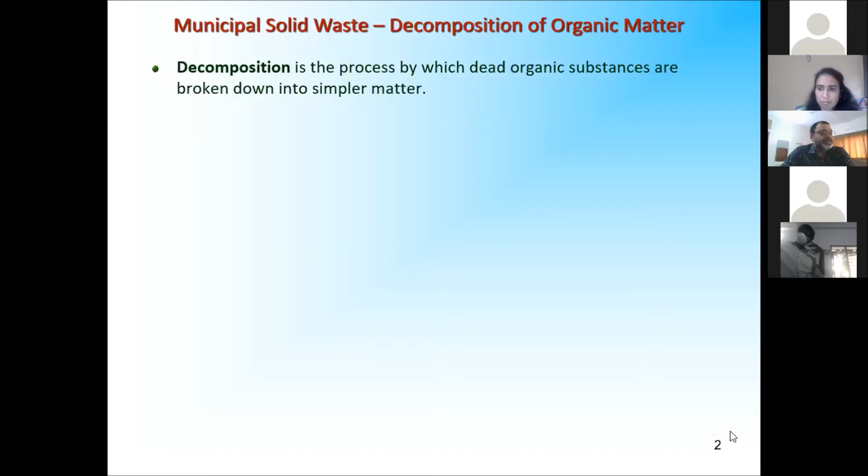Any organic matter, friends, when it dies, will break up into simpler matter. Simplest definition, that is called decomposition. When we say do not use plastics, it means it does not decompose practically. But organic matter will decay once it dies. What is organic matter? We are organic matter; fruits, vegetables, all restaurant waste, everything is organic. When it dies, it starts decaying.

I told you jokingly, why do you keep a refrigerator in the house? Because you are only storing dead bodies in it. Bhindi, aloo, pyaj, sabji, chicken, all are dead bodies. Since the temperature is low, the decay is not very fast, so you can still consume them within 2, 3, 4 days. But don't keep things in the refrigerator too long. Try to consume ASAP.

Now, friends, when God created Earth, they were conscious that human beings would come, and we need a system by which organic matter decays automatically. This decay is facilitated by microorganisms, which are present in our earth, our ecosystem, our soil, our water. They are everywhere.

So this organic matter will decay in two ways. In presence of oxygen, we will call it aerobic decomposition. So oxygen means what? It will take it from air, and air is 20% oxygen. And the microorganisms, chiefly bacteria and fungi, will use oxygen and feed upon the organic matter. And that is how the organic matter will start decomposing.

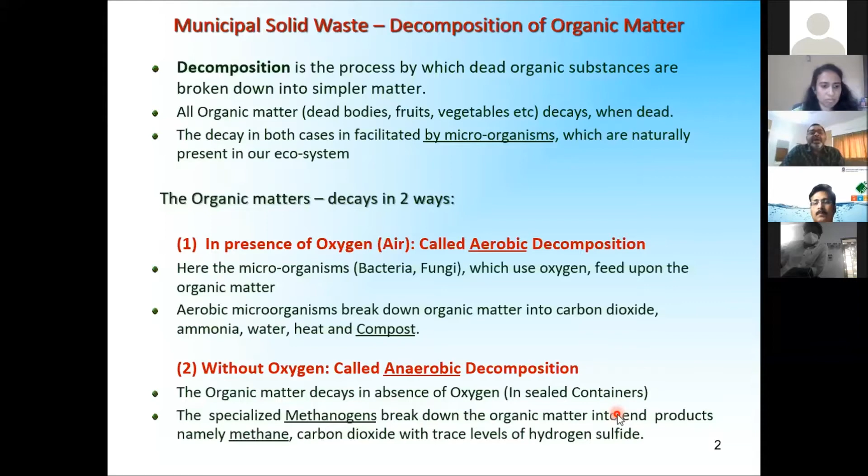And then there are traces of hydrogen sulfide. All this bad smell which comes when you go to a dump. I'm not talking of a landfill, secured landfill. Because mostly Indian cities, you know what they do? In the name of waste management, they will collect and transport garbage, and finally they will dump the whole thing just outside their welcome gate in somebody else's land. So that is called a dump, where this hydrogen sulfide and methane are all getting produced. So this is the concept. I've given this so that you will be able to appreciate the topic in a much better manner.

Now I'll just briefly touch upon the concept of waste management: reduce, reuse, recycle, recover, dispose. I am not going in the details. As good human beings, as good citizens of this earth, we should explore all the options of recycling, recovery, etc. When all options are exhausted and nothing can be done with the waste, and the definition of waste is a material which has got no use for mankind, but that waste could be very toxic. It could come in contact with air, water, and soil, what we call environment. So it has to be then safely disposed, or else it will disturb the environment. And the scientific disposal of the waste is done in two ways.

If you recall, I had told you that one thing is certain: we may be very good, we may be very bad, we may be rich, poor, beautiful, not so beautiful, but the common thing is all of us are going to die one day. Don't feel sad. This is a hard fact of life. Therefore, enjoy life till you are alive, till the last day. But if we are lucky, somebody will bury us or somebody will burn us. Similarly, all the waste in the world which has got no use to mankind is either buried or burnt.

So today our topic is only burial. Next time when Professor Chari gives me an opportunity, I will talk of incineration. It is very difficult, but since we are doing this incineration in Hyderabad, maybe an opportunity comes, I will talk about incineration of waste, because this is going to be the future of the country. Okay, burial. And remember, whatever we do, landfill, incinerator, it has to be done in a manner that in that process we should not disturb the environment, that air, water, soil are not affected.

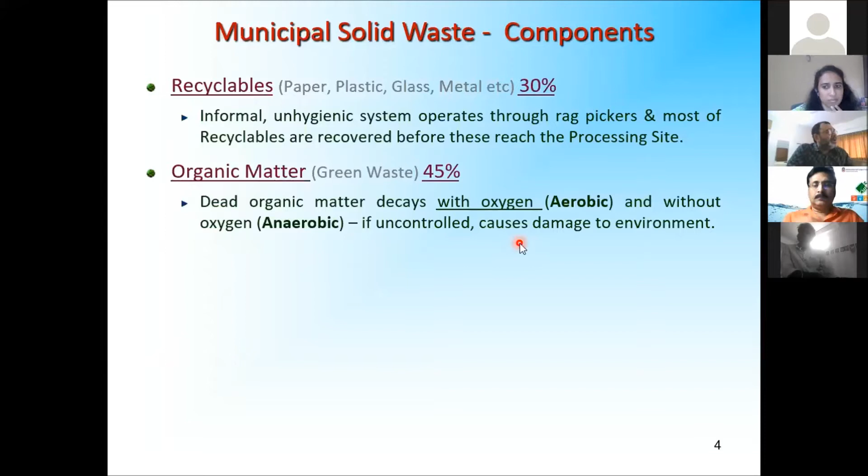Let me tell you, in India, we are only supposed to put inert material in the landfill, secured landfill. Why? Because even in the inert material, there are traces of organic material. But abroad, what they are doing, they are putting the entire organic material inside the landfill. Methane is getting generated at such a pressure and such a rate that it is good enough to power the electricity producing plants. But in India, we do not allow the anaerobic landfills.

That's what I'm trying to say, because it is very difficult to construct and more difficult to maintain. It can cause accidents. So when we talk of secured landfill, we are only talking of putting the inerts. And what are inerts? You know that.

So when we actually process the municipal solid waste at our site, as you have all learned by now very well, we convert the organic fraction into compost through aerobic decomposition. And we can also resort to biomethanation for waste from the market yards or sabji mandis, because unfortunately the fact remains, in India waste is not segregated, and it will not be segregated till there is a political will.

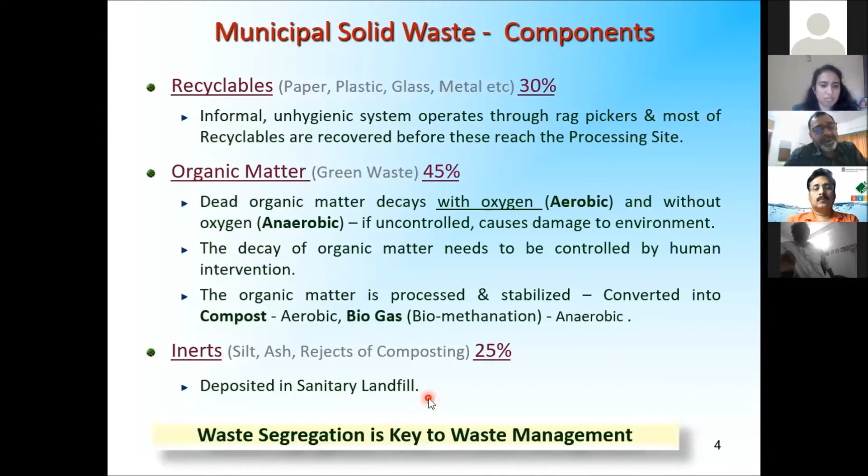So we should not encourage landfills, but it is a majburi. It is a necessity. It is a necessary evil. Though we are making money by making and operating landfills, you know that money is not important. Mankind is more important. So hope you get the message. So ultimately, whatever we discuss, that's fine, but waste segregation ultimately is the key to waste management.

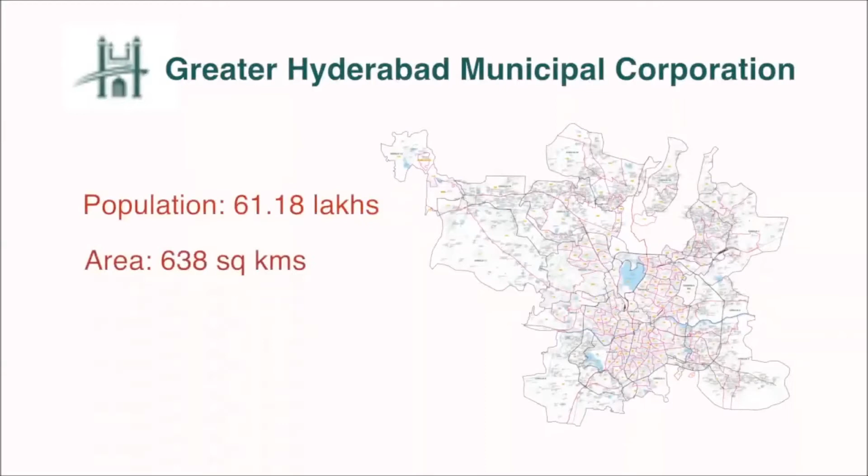The population growth, rapid urbanization, and the changes in the city of Hyderabad have seen the coming of the Greater Hyderabad Municipal Corporation. The Greater Hyderabad Municipal Corporation, or GHMC, is the local government for the cities of Hyderabad and Secunderabad. Improper management of municipal waste by disposing it unscientifically into open dumps and landfills is creating huge problems to public health and environment.

With a commitment to better the environment and to provide the best sanitation services to the citizens of Hyderabad, Ramki Enviro Engineers, a pioneer in waste management, has established a quality delivery system, the Integrated Municipal Solid Waste Management Project. The HIMSW project uses the most environmentally sound strategies for municipal solid waste.

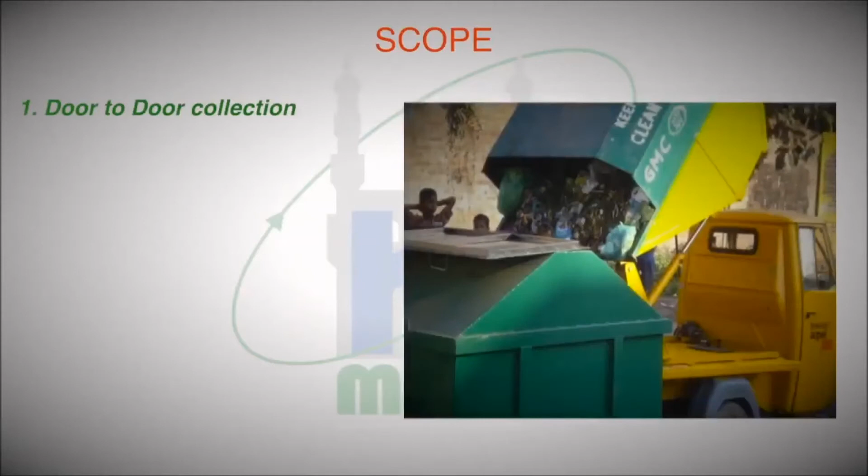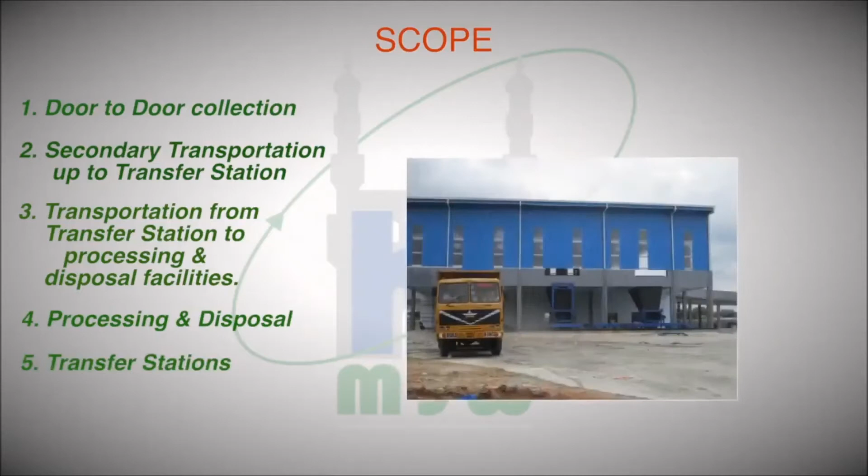Scope: door-to-door collection, secondary transportation up to transfer station, transportation from transfer station to processing and disposal facilities, processing and disposal, transfer stations, reclamation and alternative use of existing 4 dump sites.

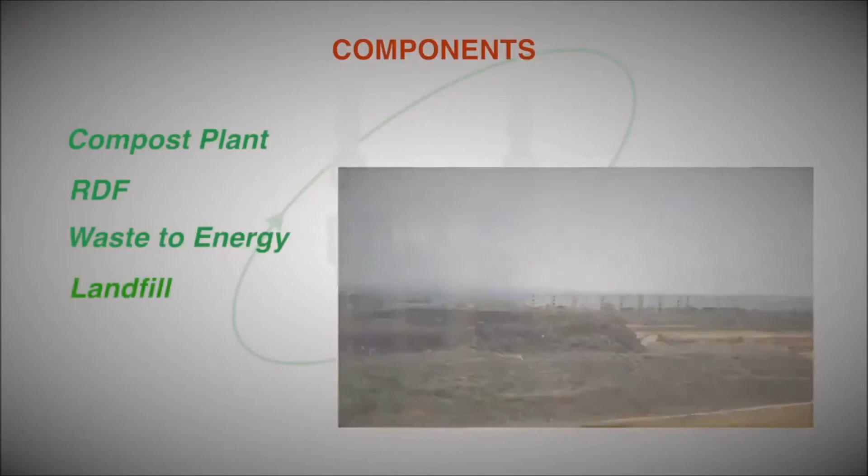Components: compost plant, refuse-derived fuel, waste to energy, landfill operations, capping of existing dump, leachate management.

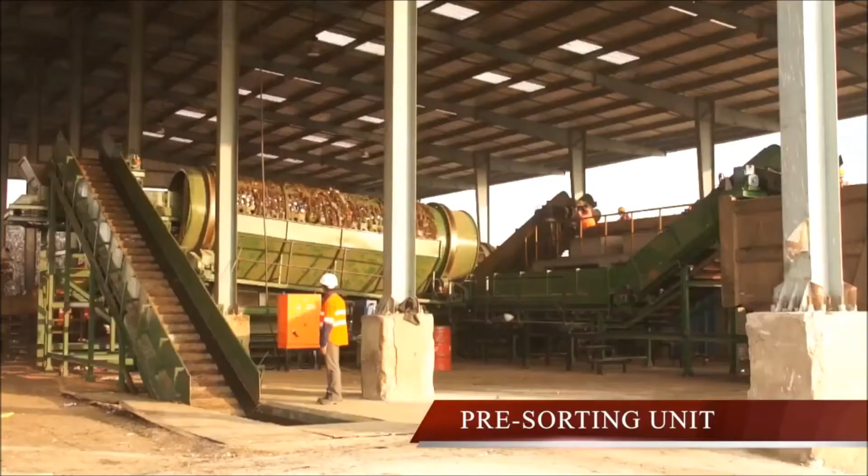The waste transported from the transfer stations is brought to the facility where each truckload is weighed and data entry is made using computers with data servers for storing and retrieving each entry. The weighed trucks offloaded at the tipping floor of the pre-sorting unit are loaded onto conveyors using dozers. The waste is passed through a 100 mm rotating screen or trommel with screens of 100 mm sieves. The recyclable material, like plastic bottles, is recycled at a recycling plant inside the facility. The material besides the recyclables, with size more than 100 mm, is known as combustible material due to high calorific value.

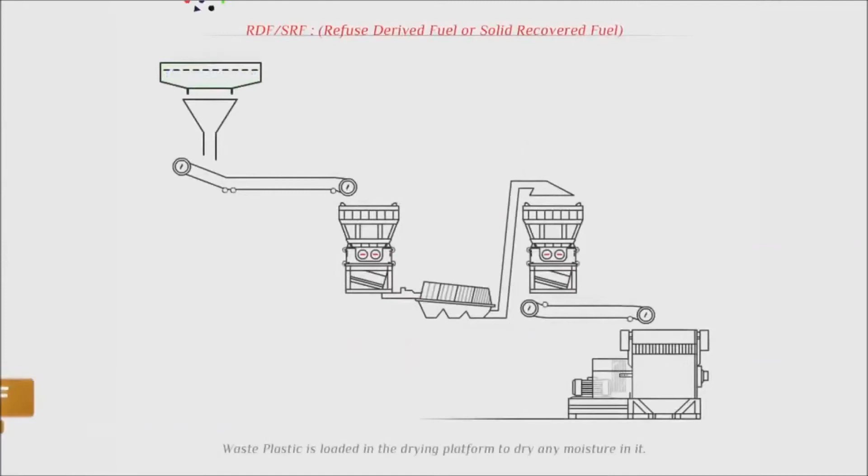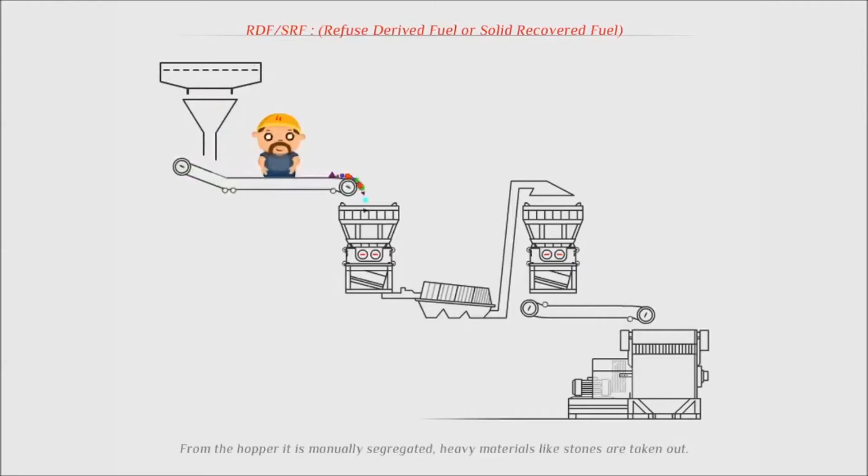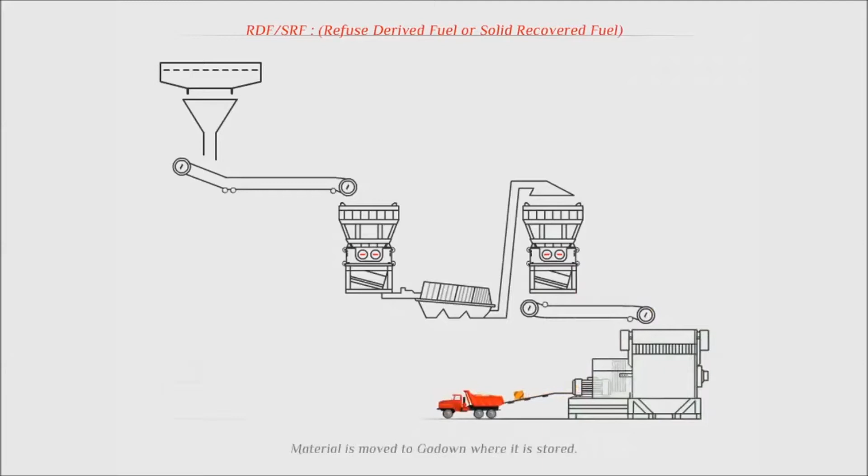Refuse-derived fuel. The segregated combustible material is further processed to get refuse-derived fuel or solid recovered fuel. The combustible material is stored on a dry concrete platform to ensure maximum moisture removal by sun drying. The dried material is fed to the hopper of a primary shredder, where the material greater than 100 mm is shredded to 80 to 100 mm material. The primary shredded material is fed to the hopper of a secondary shredder that reduces the material size to less than 25 mm. The secondary shredded material is then conveyed to a baling machine for packing the material. These bales are then stretch wrapped and transported to cement industries as fuel.

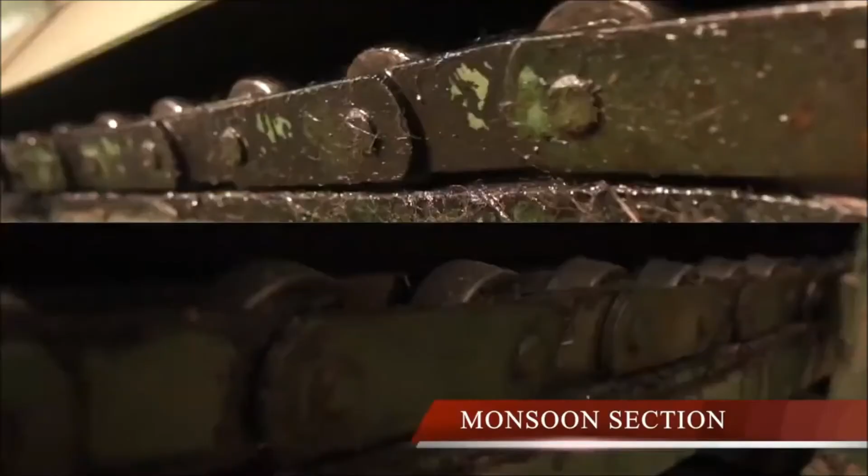The segregated material passing through the 100 mm sieves of the trommel is further processed using the windrows process. The windrows are turned for 28 days to ensure complete exposure of organic material to oxygen. The windrows are sprayed with herbal sanitizers to ensure better decomposition and ensure no odor is generated. The material from the windrows section is further refined by passing it through rotating screens of 35 mm sieves. The material with size more than 35 mm is segregated, which can be briquetted and used as an alternative fuel to fossil fuel in energy-intensive industries.

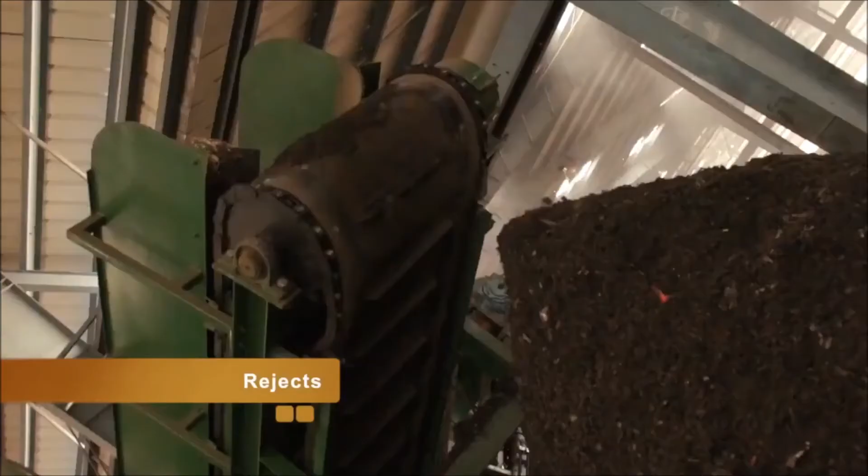Material less than 35 mm is further screened using trommels with screen or sieve size of 16 mm. The material with more than 16 mm size is segregated and briquetted for cement industries as fuel. The material less than 16 mm is stored in the curing section for final screening and curing. In the curing section, the output of 16 mm screening is sent through a final set of screens or trommels, which segregates materials less than 4 mm. The final output is refined, which meets the fertilizer control order standards and is used as biofertilizers in the agricultural sector.

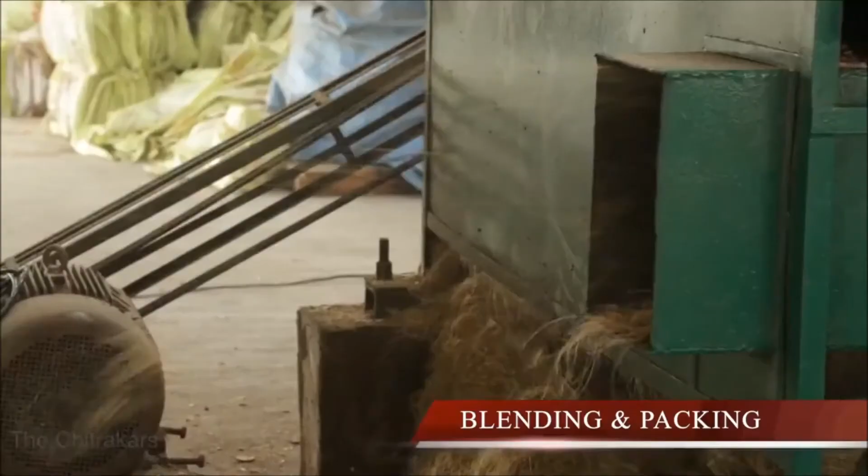The final output is further blended with additives to improve the product value and packed in a blending and packing shed for dispatch to fertilizer companies. Other recovered products include coconut coir pith from shredding of coconuts. The coir is baled and sent to small-scale industries and as fuel to factories. Waste to energy.

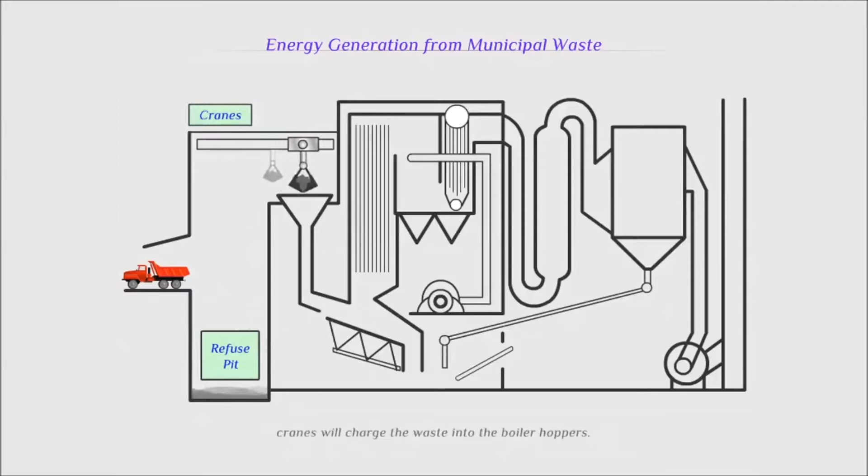The waste from the trucks is tipped in a storage pit. The storage time for the waste is 7 days with leachate addition for charging the waste. The charged waste is fed to a hopper using cranes. The waste is then passed on to moving grates that combust the waste at a temperature of 1100 to 1200

degrees centigrade. The engineering design of the furnace ensures that the intermediate gases go through complete combustion to maintain a temperature of 850 degrees centigrade. Maintaining this temperature ensures that dioxins and furans are not formed in the process.

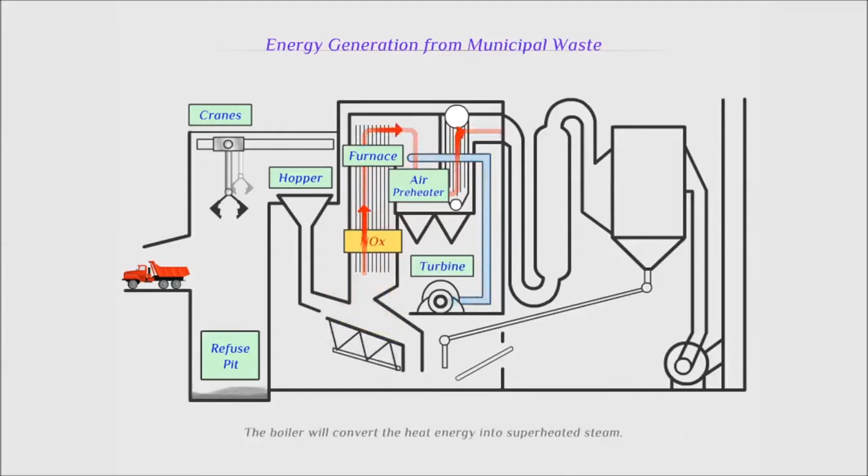The heat energy is passed into a boiler for generating superheated steam. This steam is used for driving the turbine and electricity generation. The electricity generated is exported to the grid after captive consumption of 15 to 17% of total electricity generation.

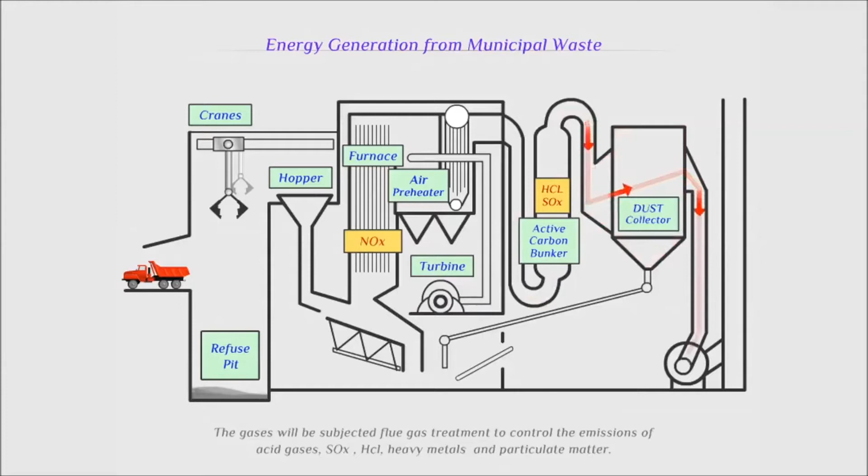The residual gases from the process are passed through an air pollution control system, which comprises scrubbers for removal of acidic gases such as nitrogen oxides, sulfur dioxide, hydrochloric gases, any heavy metals, and activated carbon filters. Any particulate matter is removed by using dust collector systems and precipitators. The bottom ash from the incineration process is removed and can be used for construction purposes.

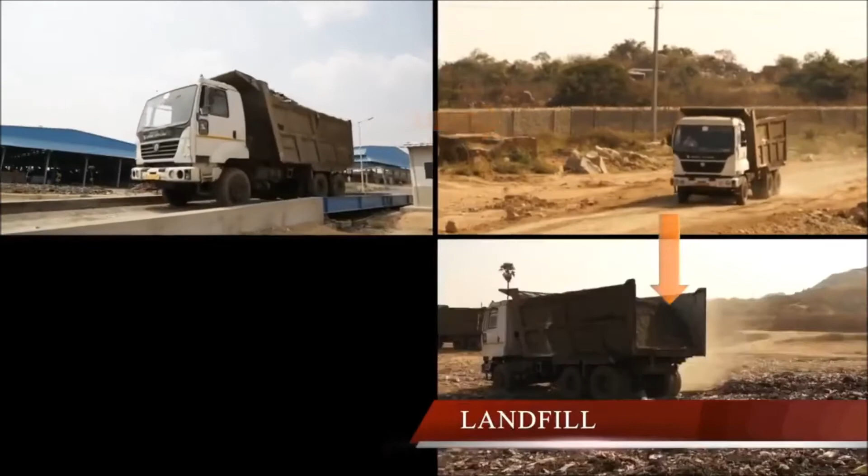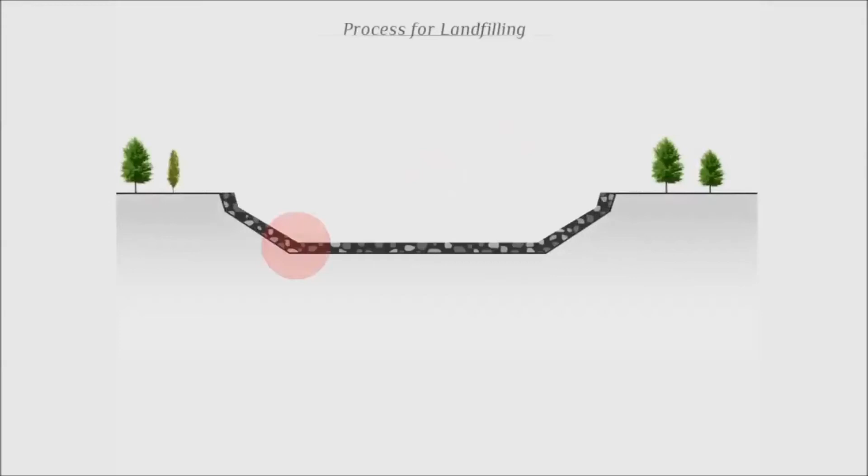Landfill. The processing of waste generates various byproducts. The inert material that is essentially present in the waste or is a rejected material of the process is disposed to a secure landfill. The landfill comprises multiple layers of boulders, clay, HDPE sheets, geotextile, and a leachate collection network of HDPE material.

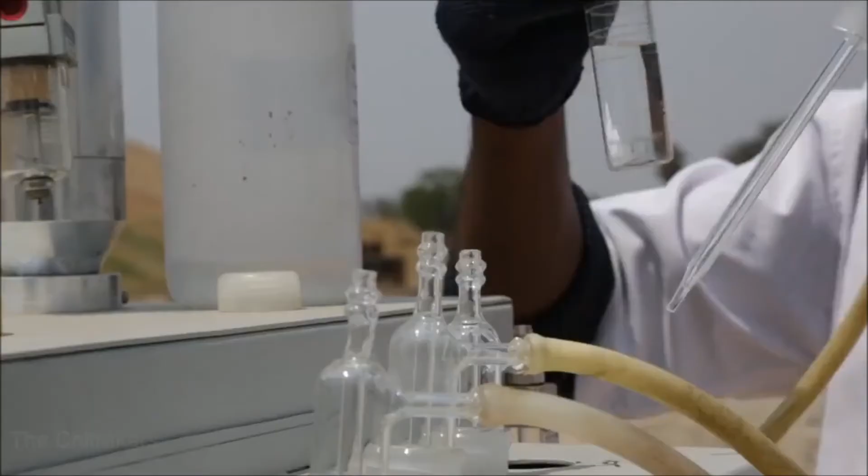These layers are of varying thickness to ensure that no leachate from the landfill percolates the soil and groundwater. Landfill operations are closely monitored to record any leachate movement. Capping. The existing site for the waste management facility has the legacy of years of waste dumping. The waste dump is capped using scientific methods.

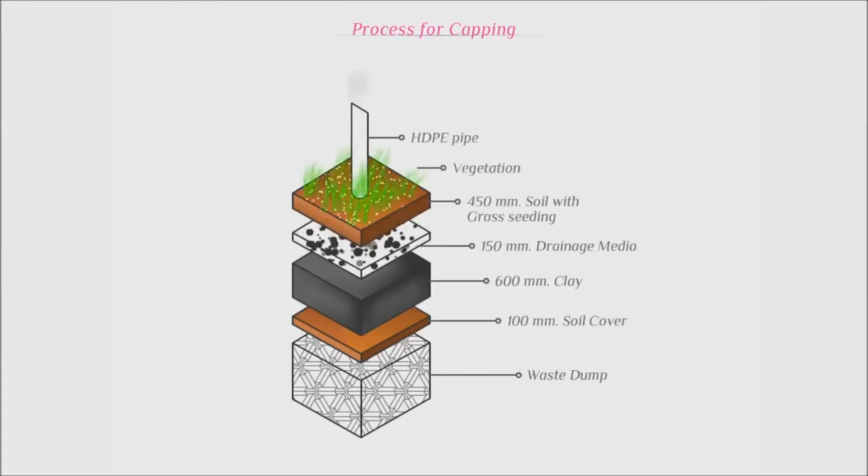The process requires laying of an HDPE piping network for collection of leachate, covering of soil followed by clay lining, geocomposites, an additional thicker soil layer, and vegetation cover. A piping network is also laid for collection of any methane gas and flaring to mitigate release of greenhouse gas emissions.

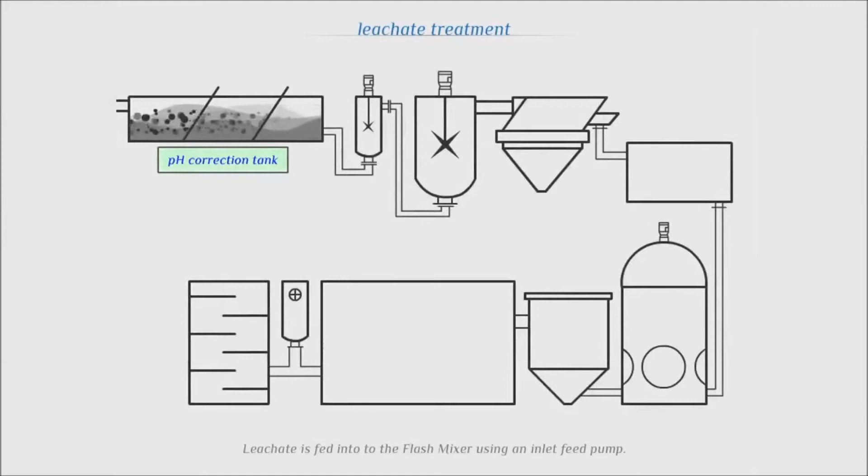Leachate management. Leachate management is a crucial aspect of the HIMSW project. All the waste stored and waste management processes generate leachate. The leachate generated at site is collected through an extensive pipeline network. Raw leachate is pumped to a chemical dosing tank with a flash mixer. Alum or coagulant is added to the tank to create flocs from the suspended solids in the leachate.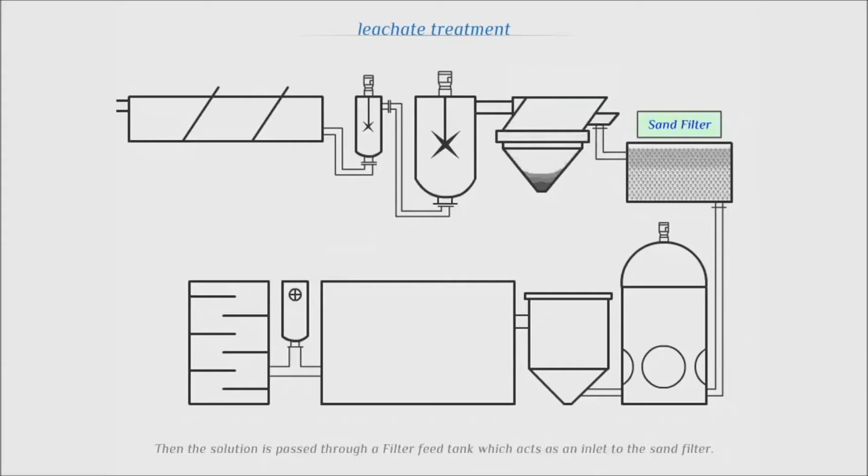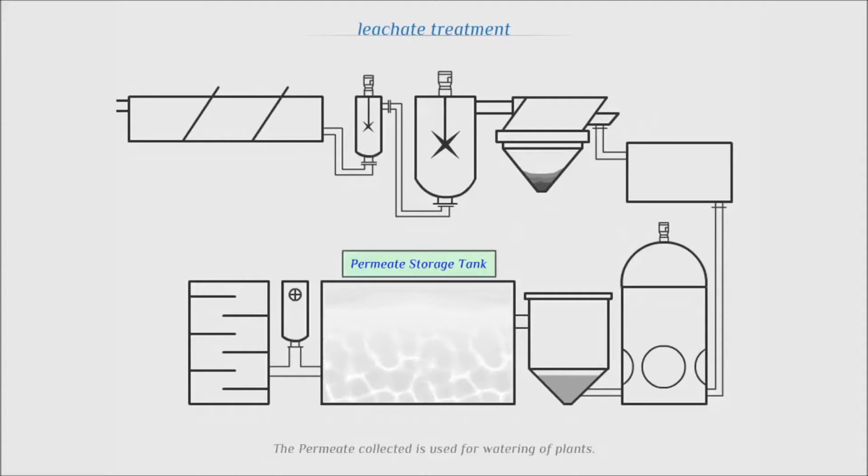The leachate is passed into a lamella settler that settles the flocs of suspended particles. The supernatant is passed through pressure sand filters that remove the remaining suspended solids and reduce turbidity. The leachate is then passed through a two-stage reverse osmosis system, which uses membranes for filtering the leachate of all contaminants and provides clear permeate, which is used for greenbelt and landscaping development.

As we do our bit for the environment and for the generations to come, we strive to deliver service excellence to save natural resources, conserve energy, reduce pollution, reduce the toxicity of our waste, and save money for consumers and businesses. The project is a model for inclusive and sustainable development for our society. HIMSW extends the vision of Ramki Group towards sustainable development.

So friends, hope you like this presentation, and this explains the entire life cycle of the waste. And I am using these terms, secured landfills. I'm sure all of you are listening to me and your chat boxes are ready. And engineered landfills. Can anybody tell me the difference between all of this? Anybody? Write in the chat quickly so that Pratibha can convey it to me that somebody has found a difference in any of these. These are the four adjectives which we are using in the system. So I thought before you get confused, it's my duty to demystify these four adjectives used before landfills.

Pratibha, any answer from anybody? Anybody know any difference amongst all these four names? No answers yet, sir. Because they are all very wise people, all are the same. There is no difference. So friends, what I'm trying to tell you is that you will come across these terminologies. These are all the same. Secured, sanitary, engineered, scientific.

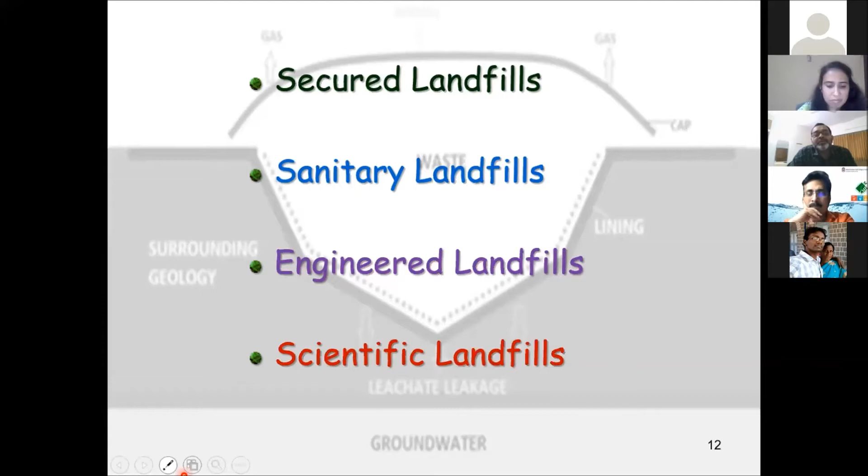So now, as I told you, the disposal options: either you burn the waste or you bury the waste. So I will only cover half the portion today, the burial part. The burning part maybe later.

This waste material, which is of no use to mankind, has to be deposited somewhere in a sealed pocket, and we will create the sealed pocket inside the earth. What is this? It is a system where the waste is jailed for 1000 years, 2000 years, till the earthquake comes and everything gets dislodged.

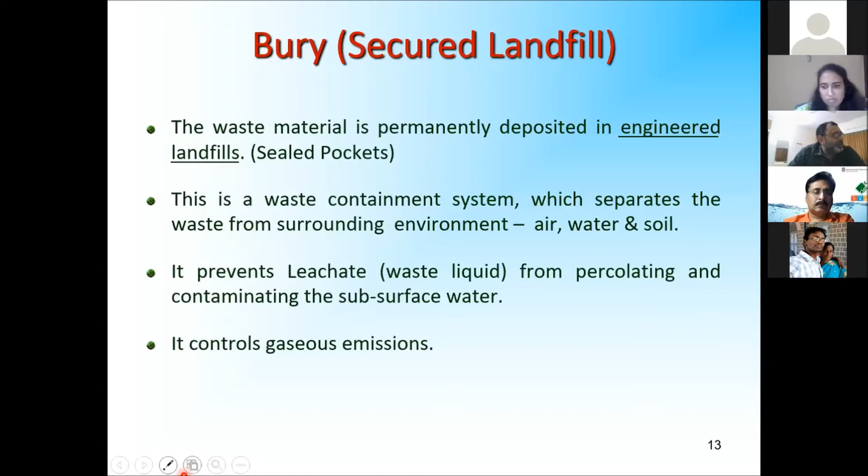Since the waste is jailed, it will not be able to come outside and interact with good citizens like air, water, and soil. No waste liquid will be allowed to percolate and pollute our groundwater, surface water, etc. And there cannot be any gaseous emissions which will be adding to the greenhouse load of the planet. So friends, I am giving you a very simple diagram.

So here, if you see, this is our land, and here we are making the landfill. This is the clean surface water which cannot be disturbed. This is a liner, flexible barrier, meaning HDPE, and this is the landfill isolated waste which is jailed. And there is whatever gas, because, as Professor Chari wrote in the topic, inert, we are putting inerts, but also some organic fractions ultimately go, and some gas will be produced.

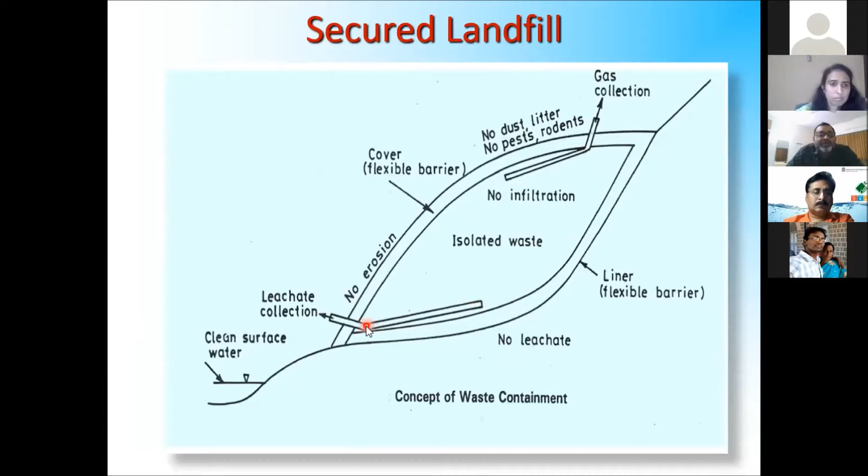So whatever methane is produced, since it is anaerobic decomposition, no oxygen inside, that gas will escape here and will be collected. And since it is already covered, there will not be any dust, litter, pests, rodents, etc. And it has a slope, so any rainfall coming, the water will go and be collected in the drain. And all the dirty water will flow with gravity, and we will collect the leachate also, right? So this is another diagram.

I will now come to the concept of a landfill. It is a 2.4 minutes video, and whatever I have talked in English so far, of course they will also talk in English only.

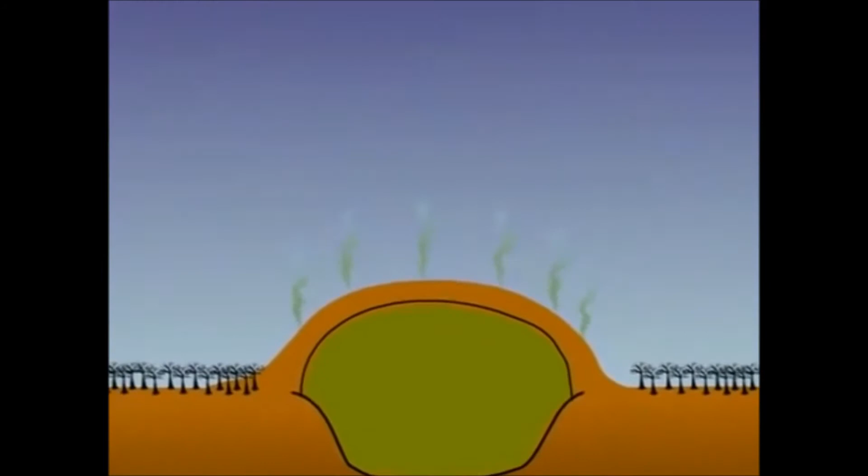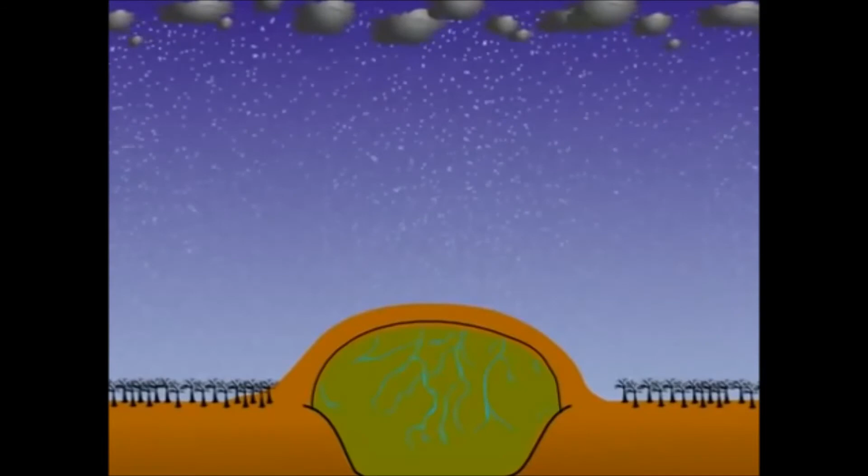So how does a modern landfill work? Imagine a giant plastic bathtub in the ground. Trash is added to the open tub and covered each day with daily cover, such as contaminated soil or ground-up construction debris. As time goes by, more and more trash is piled on, and more highly flammable methane gas builds up as the trash decomposes. This is when you start to get that trash smell. You know the one. Any water that's in the trash, or any rain or snow that seeps through the cover, starts to trickle down through the garbage. When water and waste are mixed, it creates a toxic, poisonous soup called leachate.

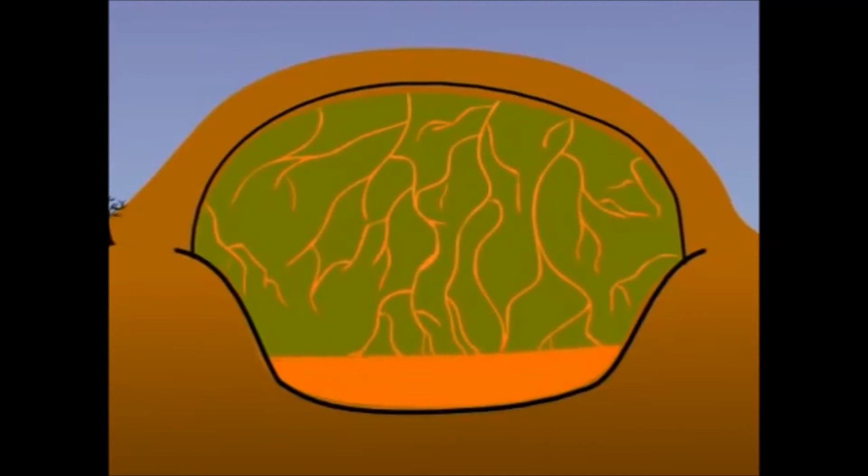Leachate contains all the dangerous stuff that's in a lot of what people throw in the trash. The tens of thousands of chemicals, heavy metals, and other toxic materials found in electronics, batteries, prescription drugs, and plastics, just to name a few. Now the leachate, containing these poisons, percolates through the trash and eventually pools at the bottom. One set of pipes collects the liquid and takes it to the collection tank. And another set of pipes collects and diverts the toxic gases. However, only some of the gas gets captured over the life of the landfill. The rest escapes into the air, rancid odor, and airborne toxins that have been shown to travel over 3 miles from a waste site. History has proven that many parts of a landfill system will eventually fail.

The collection pipes buried under the garbage will become clogged and eventually break. Liners will be punctured by sharp objects, and the chemicals in leachate will burn holes in the plastic. Even the EPA and Casella's own experts admit all liners leak. If a leak were to be detected, it's too late. You cannot repair a liner once it begins to leak. Small holes become big holes, and eventually the barrier between the waste and groundwater completely fails. How and where the leachate will reach the groundwater is impossible to predict. Hundreds of homes using private wells surround the Southbridge landfill.

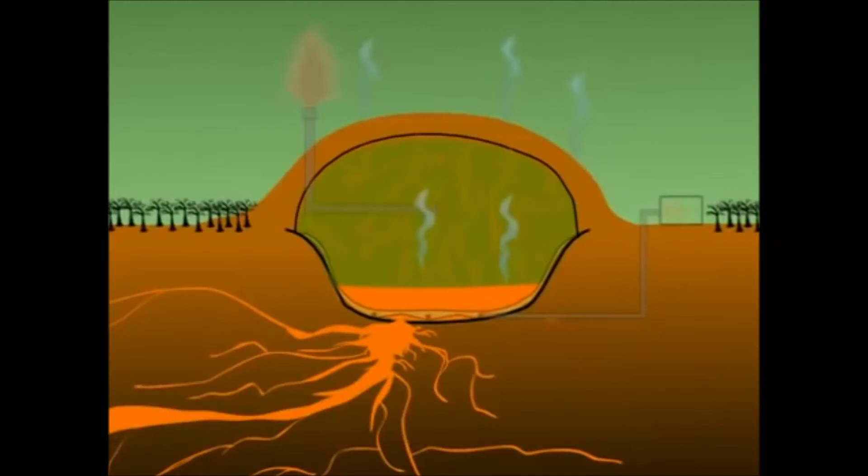The next time you take a sip of cool water from the faucet, bathe your kids in the tub, or take that long run in what you hope is healthy fresh air, think about it. Dirty diapers, broken office furniture, bathroom cleaners all sound harmless enough when you're chucking them into the trash. But now you know.

So friends, it's another important message which I want to deliver. The truth of landfills, secured landfills, is that all landfills leak. It is a fact. Because over a period of time, no matter how much care you take in making and operating the landfill, at the end of the day there will be some leakage. And now it depends upon our skills, human engineering, what integrity level you make. So therefore, the message is we should avoid material to be landfilled, and we should aim towards zero landfill. Of course, it is quite a number of years away.

Now coming to this, whatever was explained again, you can see this is the landfill which we have dug, and here the leachate is pumped out through submersible pumps. It goes in a leachate pond for further treatment. Whatever gas is produced, very little quantity because it is all inert, so it escapes or it is flared or it is captured.

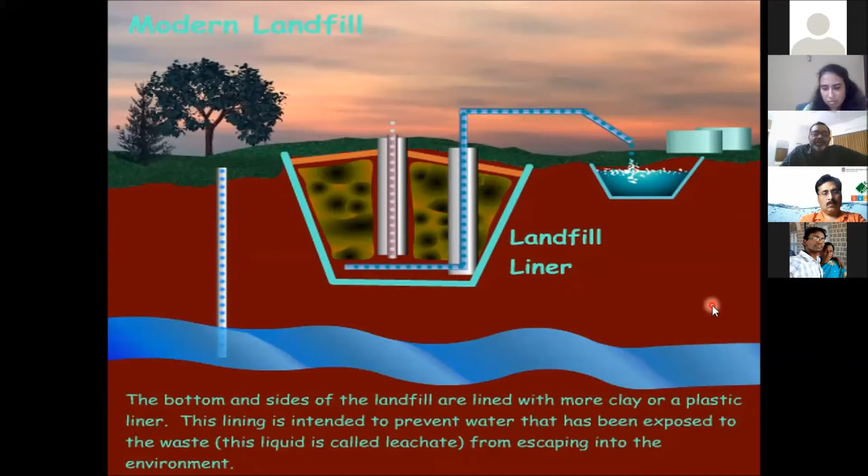And you can see this is the upstream, this is the downstream, and we are always checking the water quality upstream as well as downstream to see whether this landfill has got integrity. If it leaks, then the water quality here will definitely be worse than this, and then we can find out whether the landfill has been made properly or not. So this is another diagram.

Now let me make it slightly more complicated. So friends, in a scientific landfill or a secured landfill, you can see the clay liner at the bottom. Then this is another liner I was talking about. This is actually the in situ site clay. This is our clay which we put and compact here. Then for all the leachate of this waste which is now captured inside the landfill, these leachate collection pipes are there.

And you will well imagine these are all perforated pipes. These pipes will rest in a gravel medium, so that there is no hindrance to the leachate flowing out of these pipes, so that it can be collected. We'll go into the details later on. And then there are geotextiles to see that the HDPE liners are not punctured. So as a protection between this media and the liner, we put those geotextiles. Then you can see this gas collector. Gas is collected from the landfill and it goes to the collection. So this is another good diagram I thought I'd share with you.

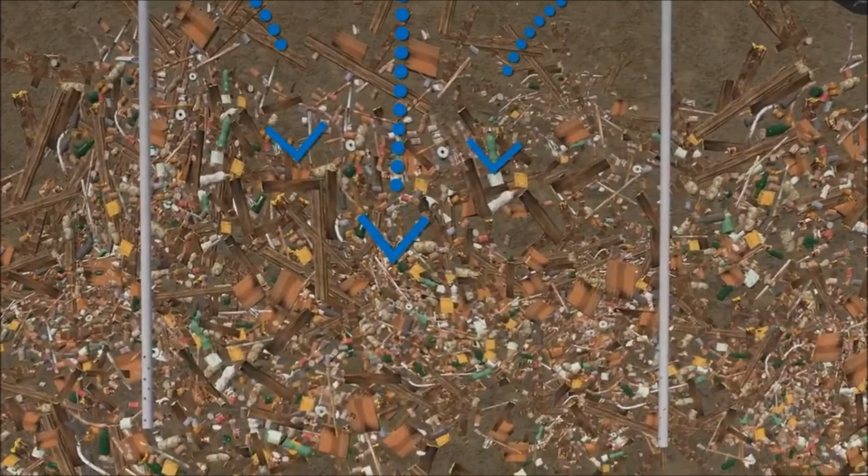We all know rotting garbage is stinky, and it's even worse when it gets wet. So you can bet the stink is sickening when it rains on a 100-foot-tall mound of rotting garbage. Of course, that happens a lot at landfills here in southeast Louisiana. When it rains at any landfill, water seeps down through the grass and earth, through the garbage heap, and collects on the bottom. So do liquids that ooze out of the garbage when it decomposes. All that liquid is called leachate. As the garbage decomposes, it emits gases like methane and CO2. A layer of gas forms on top of the leachate. Landfills have a system to collect both the leachate and the gas so they don't contaminate the environment.

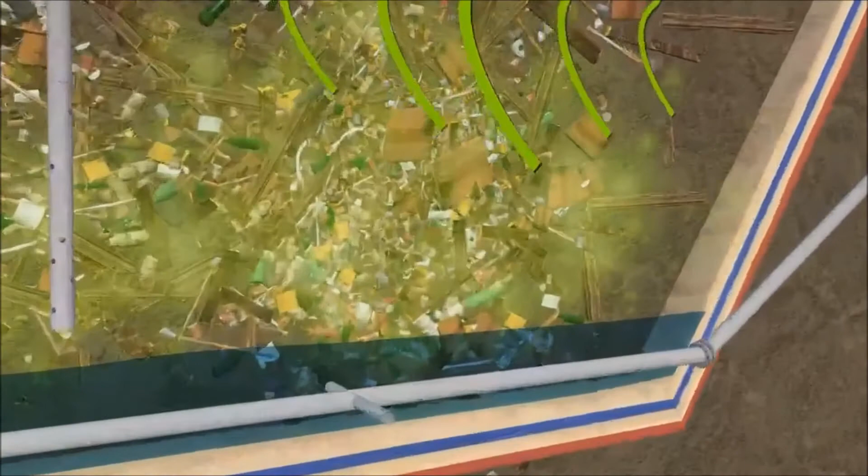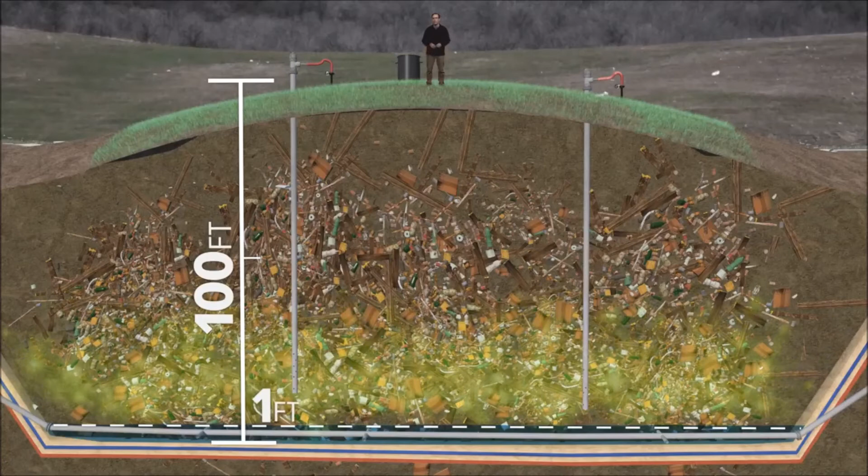Pumps send the leachate to retention ponds, where it's treated and stored. There are also vertical gas wells running down through the landfill. They use vacuums to collect the gas. Different pumps inside those wells send the gas up and out to a gas plant, where it can be processed and sold as usable natural gas. Now, if these pumps are working properly, there should be only 1 foot of leachate under that 100-foot mound of garbage. The vacuums that suck the gas into the wells sit right above that normal leachate level.

But if the pumps are not working, like they weren't at Jefferson Parish landfill for years, the mound of garbage becomes flooded with leachate. That flood of leachate can block the vacuums from sucking the gas into the wells, and now that layer of toxic, smelly methane and hydrogen sulfide isn't being collected anymore. Instead, it rises up through the landfill and escapes into the air.

By now you have at least understood the secured landfill purpose, design, everything. And now whenever we have this waste processing plant, obviously there would be rejects. I am not talking of RDF, I am talking of rejects. So those rejects will have to be managed in a secured landfill, and as I told you, it is a necessary evil.

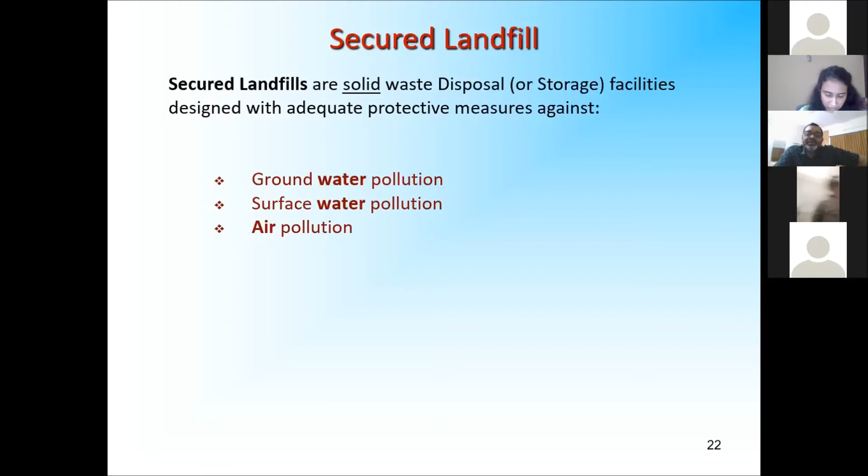A fully integrated secured landfill will give you these benefits. It will protect you from groundwater pollution, surface water pollution, air pollution, soil pollution. So for me, environment is always number one: air, water, soil. Fire hazard will not be there. Birds menace, obviously, you have seen in the pictures before. Pests, rodents, greenhouse gases, methane, and dust, wind blown litter, bad odor. And of course,

let me also tell you something. When you start putting garbage in a heap, like in Delhi or any big cities like Mumbai as well, there is a thing called angle of repose. Angle of repose is an angle; if it goes beyond that, then the whole slope will come crashing down. So those garbage dumps are also prone to coming crashing down and engulfing the entire hutments, etc., and of course erosion. So when you make a landfill, all of these problems are taken care of. Okay.

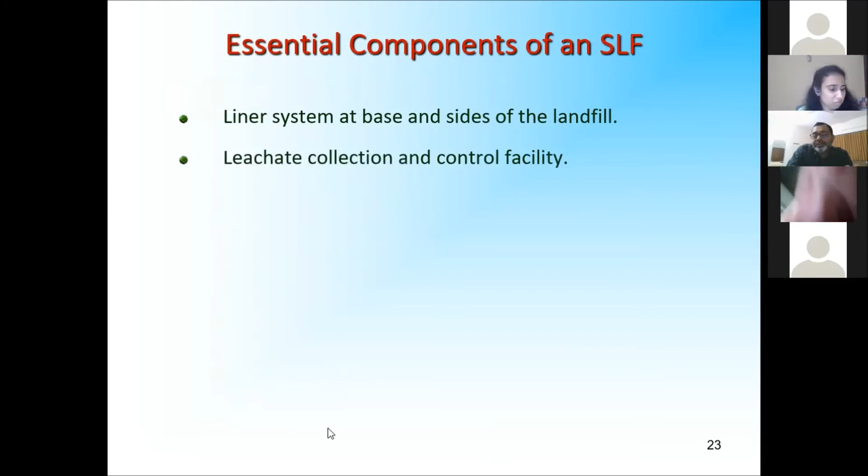Now, what are the essential components of a secured landfill? As you have seen, there has to be a liner system at the base and sides of the landfill. Then leachate collection, gas collection, and once we have closed the landfill, there has to be final cover. Then surface water will come, so drainage system, and lab for environment monitoring, and closure and post-closure plan. These are the requirements at the site when we have a secured landfill facility.

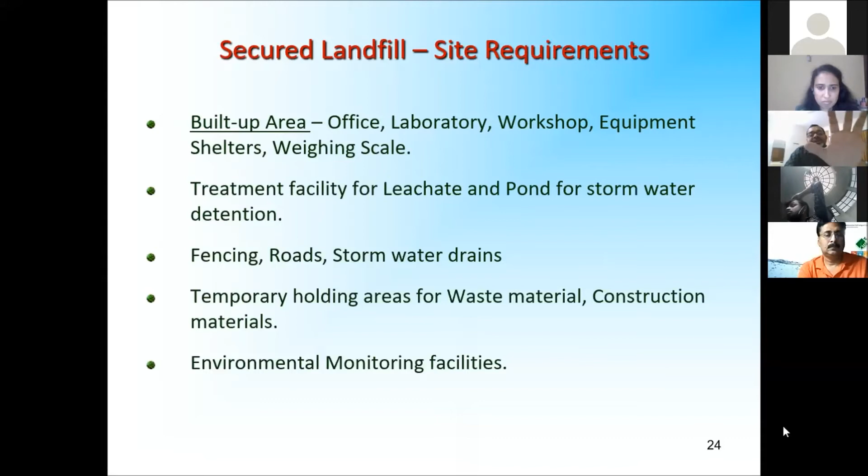This will have office, laboratory, workshop, because a lot of heavy equipment is there, so repairing, and the weighing scale, then treatment facility, then you have proper fencing, because it's a very dangerous facility. Stormwater drains, and then areas for holding the waste material. Of course, there will be construction materials as well. These are the basic minimum things which are required in a site where landfill management is being done.

So friends, what is the life of a landfill? Design life of a landfill is equal to all these four items. One, construction period of a landfill, let us say 1 year. Active period will depend upon the site, the area and the waste, so typically 10 to 25 years. Then finally, when the landfill capacity is full, you have to have a proper closure.

And don't think that once I've capped everything, the pollution control board has tested water quality and gives you a certificate of excellence. No, nothing. Problem is, as I told you, all landfills in the world leak. Let us accept it. So the real test and integrity of the landfill engineered by you will be known later. For the next 30 years, you have to keep checking the water quality and air quality and all those things. So a landfill itself is a very big liability.

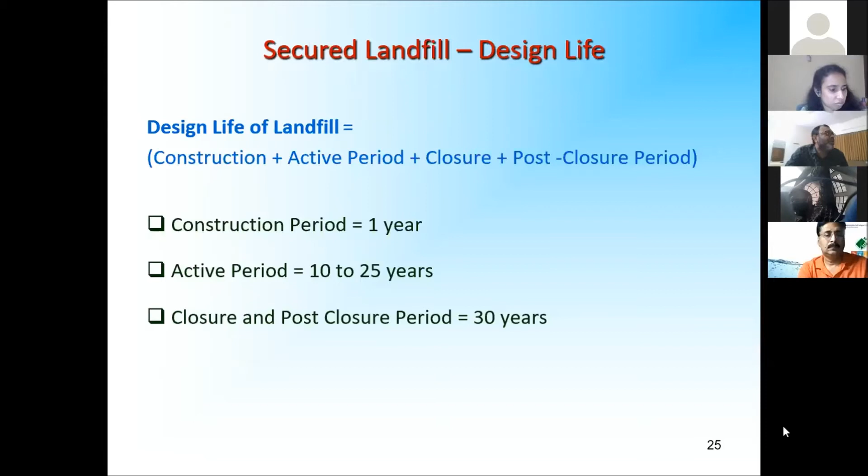And so now we will spend some time on construction and development of a secured landfill. You have seen in the videos, they have shown many layers. They are showing clay, they are showing HDPE, high density polyethylene, etc. So let me tell you one by one.

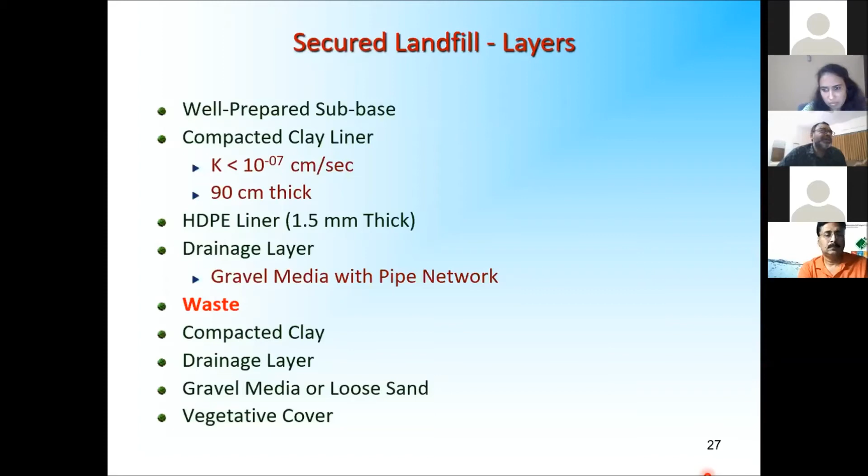Unfortunately, this landfill mountain cannot be used for any productive purpose. It can at best be used as a recreation park, or even children are allowed to run over it, no issues. But then you cannot make anything, because it is all waste inside, no? So now, whatever I have said so far, I will explain in a diagram. You can call me back, no problem.

So first is subsoil, then this is the compacted clay layer, then 1.5 mm thick HDPE. Then there is a gravel media within which these perforated pipes are placed so that the leachate can come out freely. Then the whole waste is deposited here, and finally another 60 cm of compacted clay, then again drainage layer, then vegetative cover, and that is how the landfill gets closed.

One thing which I have not shown here, friends, between HDPE and gravel, there is another fine geofabric, so as to prevent sharp gravel damage to the HDPE. So that is a small thing. I don't want to make it complicated.

The principle is we should make our life simple, in house, in office, generally, and remain happy. If you make complications, you will be an unhappy person.

Now let us have a small video, 2.5 minutes, of whatever I have explained. We will see that. Okay.

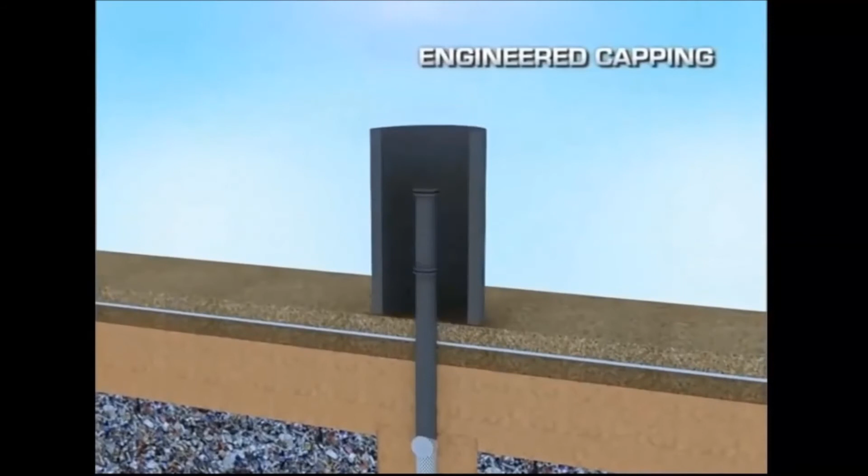So, friends, you've seen the video. When we operate landfills in our sites, we do not operate the whole thing at a time. We have phases. We earmark the land for landfill, and then we operate in phase 1, 2, 3, 4. And again in phase 1, we operate cell by cell. So today's waste, when we dump and compact it, over that we have to put a soil cover every day so that there is no disturbance from rodents and other things. We will see that in some detail later.

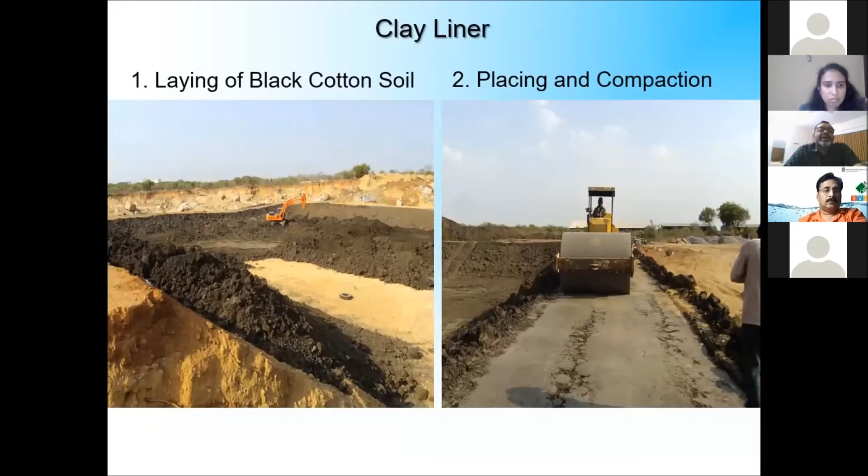But now let me tell you through pictures the stages. These are all taken from our site. So there is land excavation on a massive scale. And after that, this black cotton soil is being put and rolled. And then clay lining has been done here, and now this landfill is ready to receive the HDPE. This is in Dobaspet, Bangalore. So now this is HDPE. You can see the huge area and the size of the lorry here.

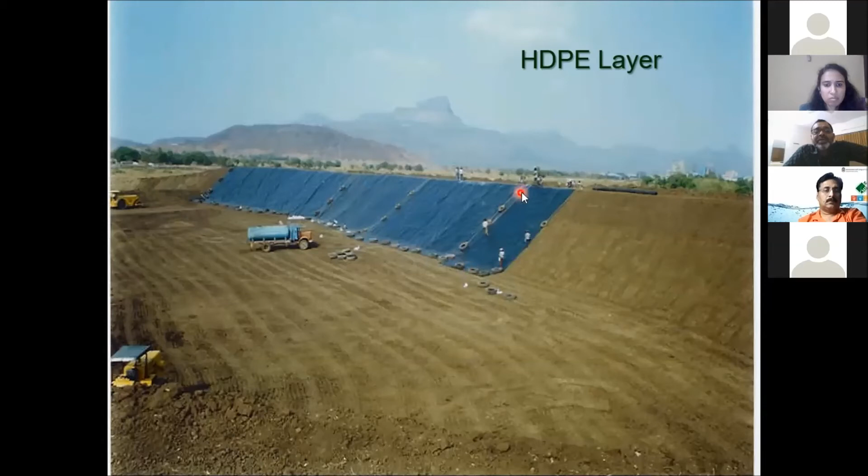So all this HDPE, high density polyethylene fabric, has to be spread. But you must be wondering, there are two fabrics, so where is the jointing? How is the jointing done? Because this jointing is a very great engineering art and skill. It has to be done through hot wedge extrusion welding. Now you can see the HDPE liners are getting welded. So it becomes seamless. It is very important. It is done by trained people only.

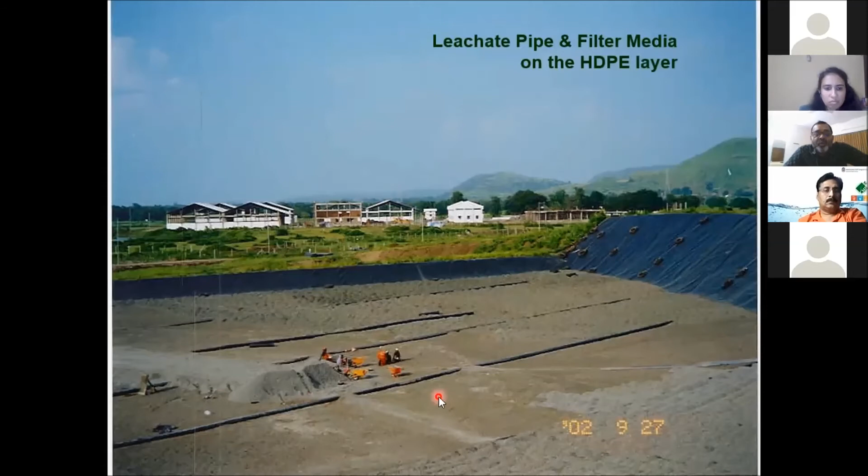And finally, the drainage media, filter media, and the leachate pipe. So all these are being put over that HDPE. And then we have to see how we operate the new cell construction. It is a small video of 2.5 minutes. In this video, we're going to show you the actual construction of a liner. So you're going to see these different components being actually built in the field.

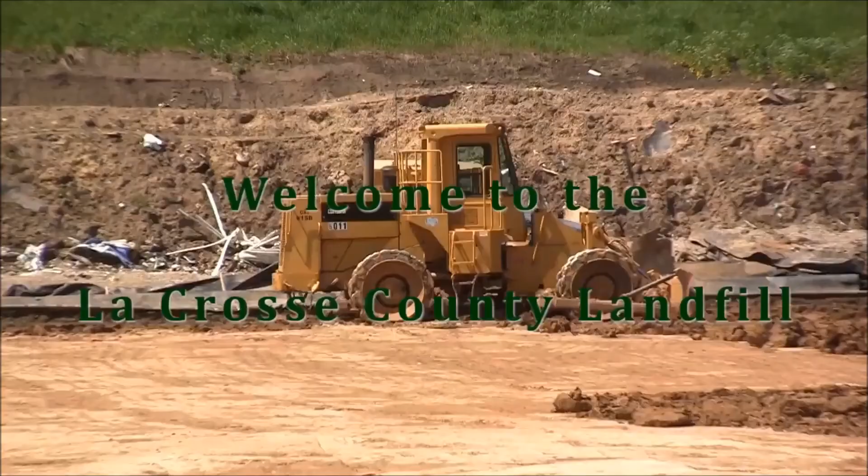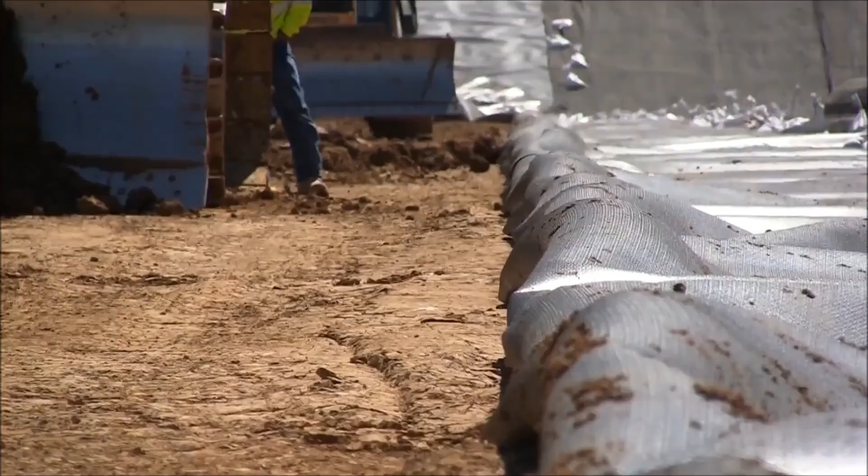Good morning, folks. My name is Hank. I'm the director of the La Crosse County Landfill. Have you ever wondered what's at the bottom of a landfill that protects our groundwater from becoming contaminated? When water gets into a landfill, it produces a liquid called leachate. And we don't want that to get out of a landfill, and so we put liners at the bottom of a landfill. But a liner isn't just a simple piece of plastic, it's many different components. A modern landfill has a very thick layer of clay, 4 feet in thickness, and then has a synthetic on top of it. So as you look at a liner, all this is clay material. It's 4 foot thick and it's very carefully placed.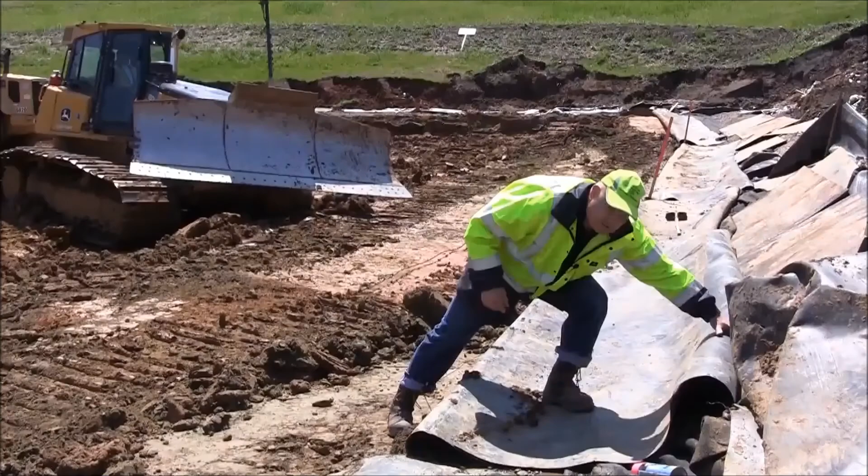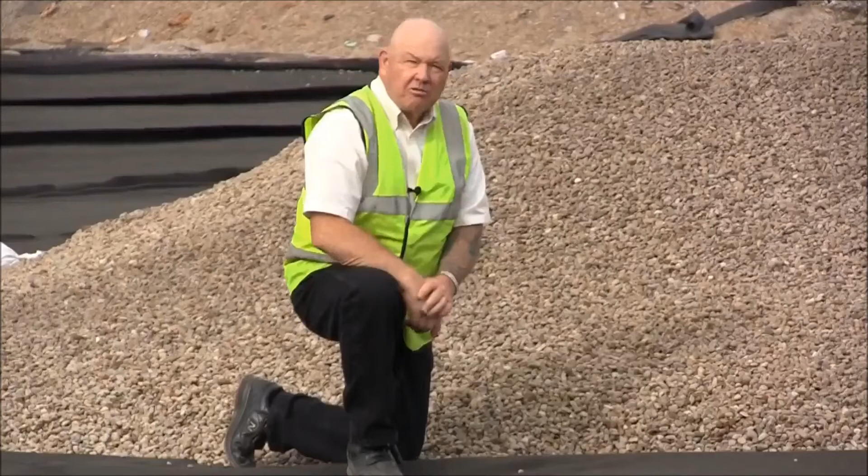Above that, we put a synthetic layer made out of high density polyethylene. And above that, we put a fabric to protect it from punctures. The liquid has to be collected. It can't get through the liner. So we put special layers of rock at the bottom of a site, and we put special pipes in the landfill site that will take that liquid out. We're at the base of the landfill right now. This is the fabric that's protecting the synthetic, and below the synthetic, there's 4 feet of clay.

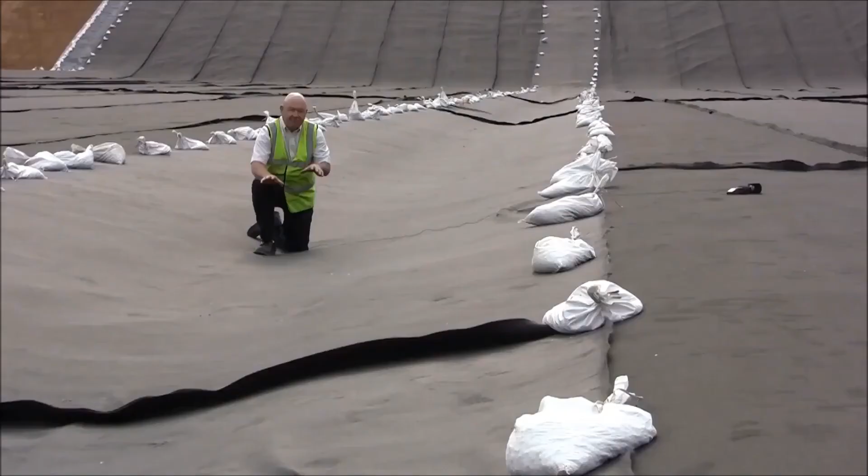This is the gravel that's being put on top of this now. They'll thin this layer out to 1 foot thick. And I'm now in the trench where we're gonna put a pipe that's gonna take the liquid out of the landfill site. I'm on top of the synthetic liner and the fabric, and we'll put a round pipe in here

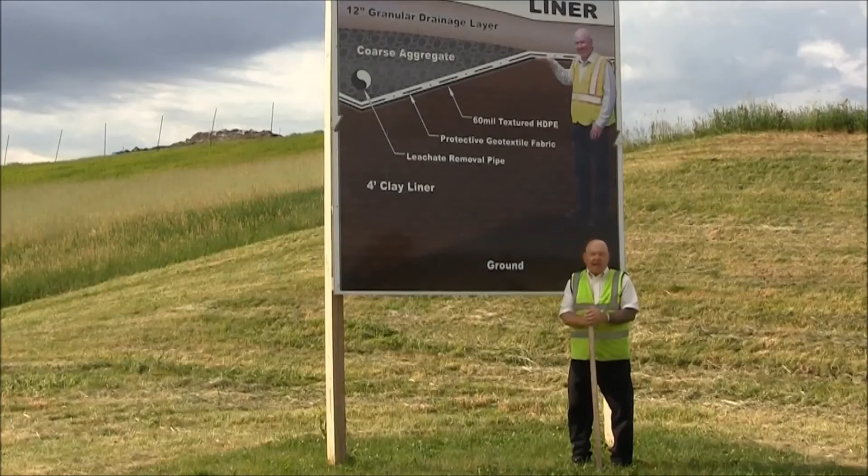that goes the length of this trench, and we'll bring over some more gravel so that the whole base of this landfill site will let the liquid go into the pipe. That can be taken out so it can be treated at the La Crosse County Sewage Treatment Plant. So you can see that a liner is made up of a lot of components, specially built, carefully certified, approved by the DNR, and that's how we protect the groundwater that's below a landfill site.

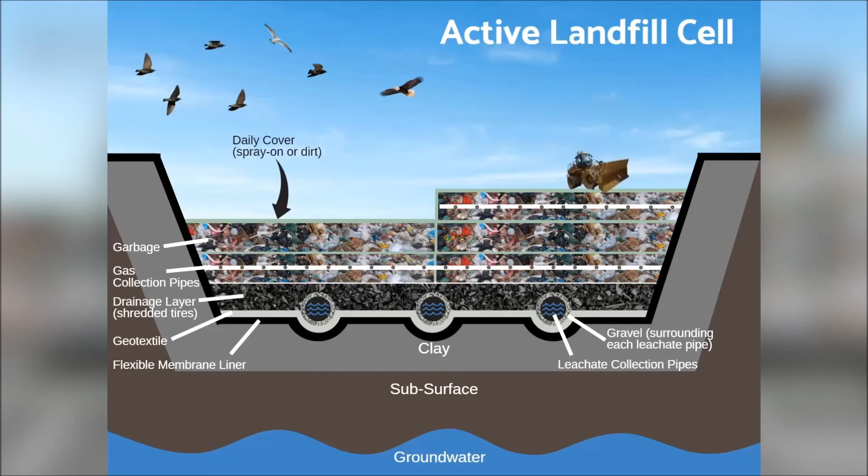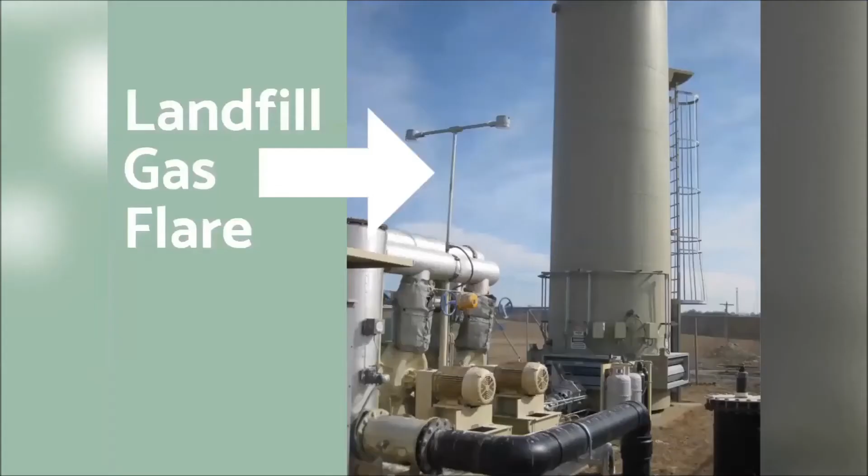Let's circle back to gas collection. With the closed cell, we can now see that there is a gas line connecting all the horizontal lines, which leads us out of the cell and up to the gas well. This pumps the gas, keeping it moving down to the trunk line, which transports the gas to the flare. The flare is where we burn the gas at a very high temperature, which converts the methane to carbon dioxide, a less potent greenhouse gas.

On the top of the covered landfill cell, seed is planted so that a mix of grasses can grow. When a landfill cell is closed, it often just looks like a grassy hill. But as we have discussed, there is a complex system going on below the surface that continues to collect gas and leachate for many years after a cell is closed. Thank you for joining us today to learn about the inner workings of a landfill cell. We've been illustrating with mostly...

So friends, this was a very detailed video covering all the concepts which we have learned so far. Once the landfill is full, then we have to do the final capping and we have to close it, and that is how a capped landfill looks like. This is one of our landfills somewhere, maybe Hyderabad. So you can see these small gas vents. And this is a capped and a closed landfill. And this does not mean the end of our duty and responsibility. For the next 30 years, we will have to monitor all the environmental parameters.

Now, friends, let me थोड़ा पैसे वैसों की बात कर लेते हैं, because at the end of the day, we are all in business. Money is required. Environment does not come for free. If you have to protect environment, you have to pay money. And who pays money? That is also very well settled. Polluter pays. The person who is polluting has to pay. So there is no doubt about that. Therefore, corporations have to pay because the citizens are polluting the environment, and citizens are paying how? The property tax.

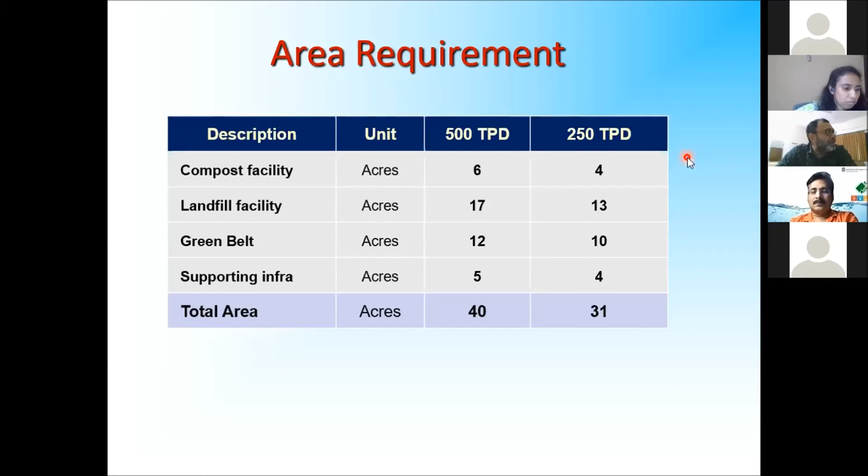What to do? There is no land. You require at least 30 acres of land for a proper waste management system. And I told you in the last lecture how to find land. And we found land. There is land available in every city. If you have a question, I will tell you again, but I will not tell you now, because I'm sure you must have heard me correctly last time. I will find land for every city. You have land in the city, but then you have to discover it.

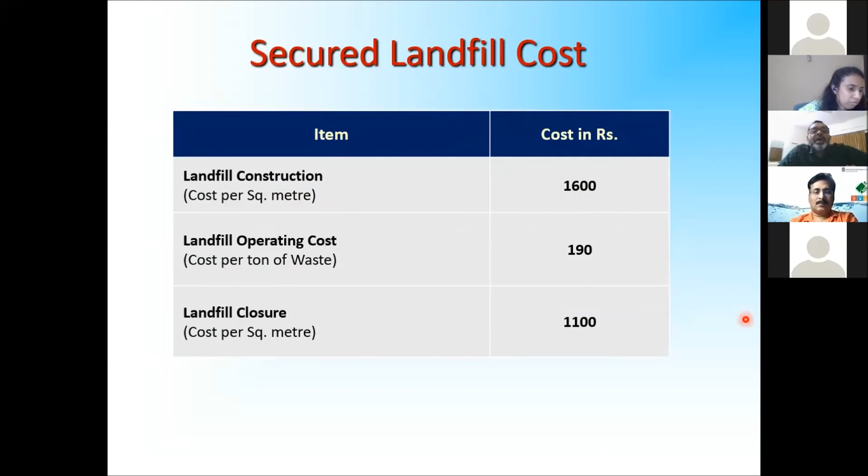And now I am going to close with a request to all of you to make our country clean and green. Thank you, friends, so much.

Friends, today we had a very intense session on landfill management, as Ravi Kant sir said, scientific, secured, SLF. So these are all the nomenclatures used, but primarily what we are trying to do is to contain the waste and ensure that, as he says, not an iota of waste goes and spoils the air, water and groundwater. But as he also said, every landfill leaks. So we have to be super careful in following the proper specifications and design.

Friends, typically, the people who make landfills are not contractors, they are concessionaires. The DPR for municipal waste management can be prepared by a consultant, but they do not have the ability, and also the time, and also the data, the primary or secondary data expenditure which would be required to make a perfect DPR. Therefore, they would mainly concentrate on waste characteristics, how much waste, where is the land, etc. Not that they don't want to make it, but they will not be able to make it within the money which is given to the consultant.